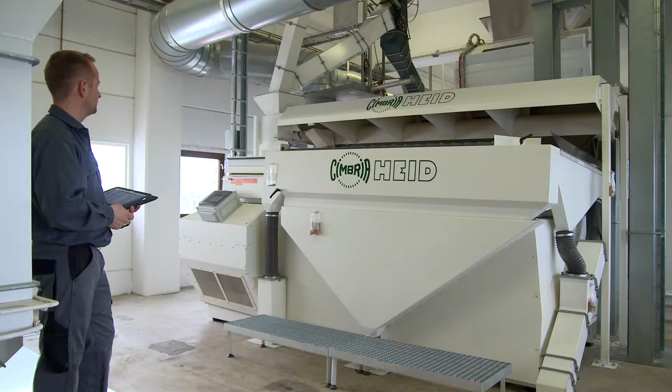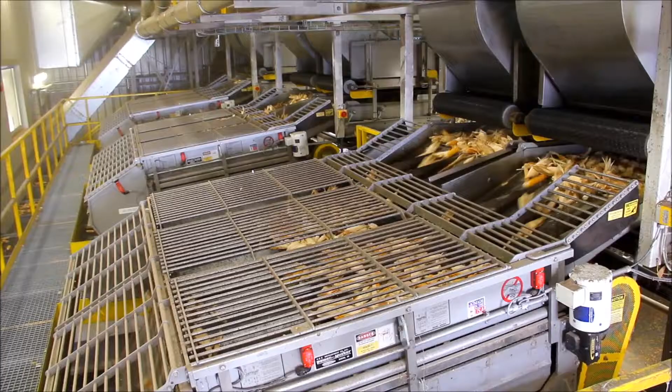Cimbria is a market-leading manufacturer of equipment for the bulk handling and processing of seed and grain. The business was founded in 1947 in Denmark, which is still home to two of its manufacturing facilities and the company's headquarters. Cimbria produces equipment for sorting, cleaning, drying and storing seed and grain, as well as custom-built handling and processing lines. Cimbria is really playing a part in feeding the world.

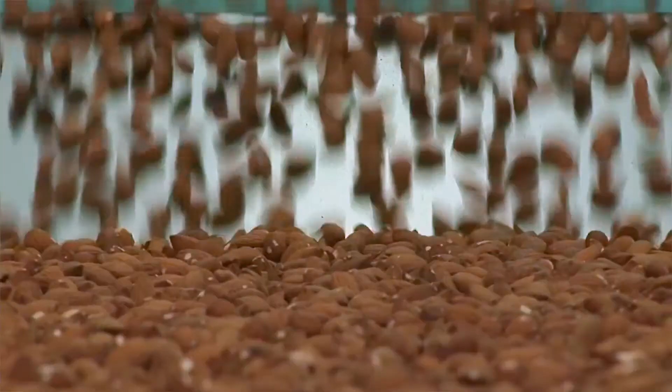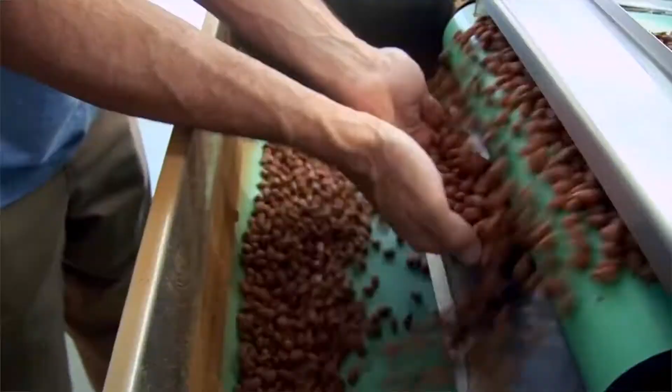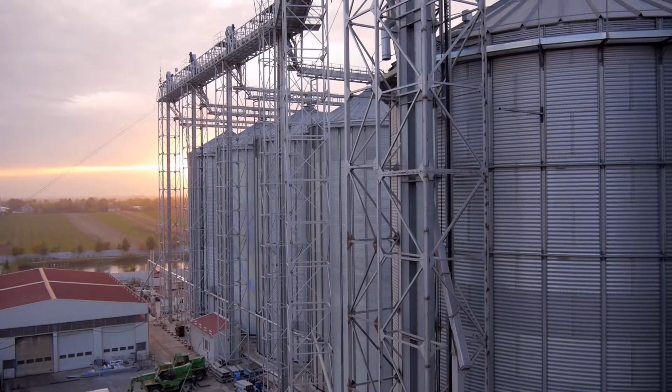We are number one in seed globally. We are number two in EMEA on grain. We are present in more than 42 countries in the world, producing grain infrastructures and also seed processing plants. And we deliver this to a large variety of customers like Monsanto, Syngenta, big seed processing companies. We also serve food companies like PepsiCo and also local players. Our solutions are actually helping in getting higher yields out of arable land, and it's also helping in storing grain and other food commodities.

For over 20 years, Silverfleet Capital had been investing in the Nordic region, as well as building businesses in the manufacturing sector across Europe. This reputation, together with an interest in the growing agricultural technology sector, led to Silverfleet Capital investing in Cimbria in April 2013, with a view to taking the business to the next stage.

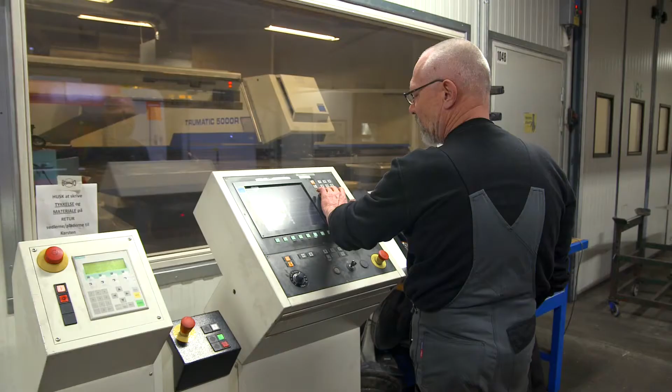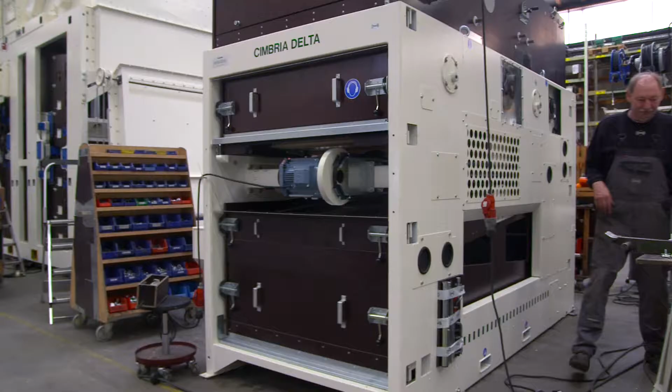Cimbria did tick all the boxes that we like in terms of manufacturing, Nordic, international and this agri-tech exposure that we like. The plan was to review Cimbria's manufacturing footprint, review its products and address entry into new markets. We wanted to essentially take the brand heritage that Cimbria has and focus on the European, Middle East and African market. At the time of investment, manufacturing was based in Denmark, Austria and Italy.

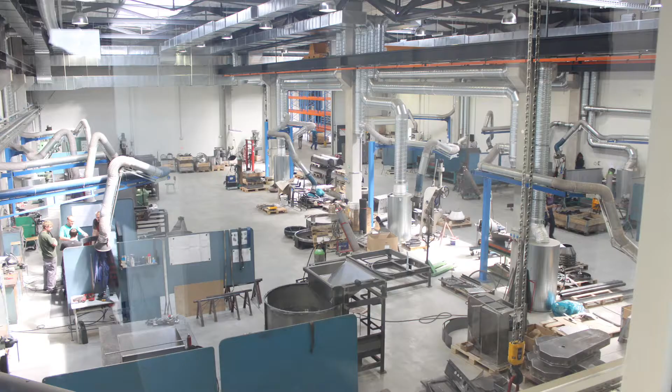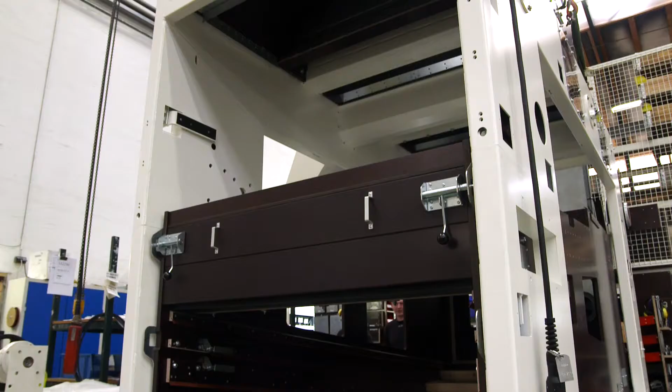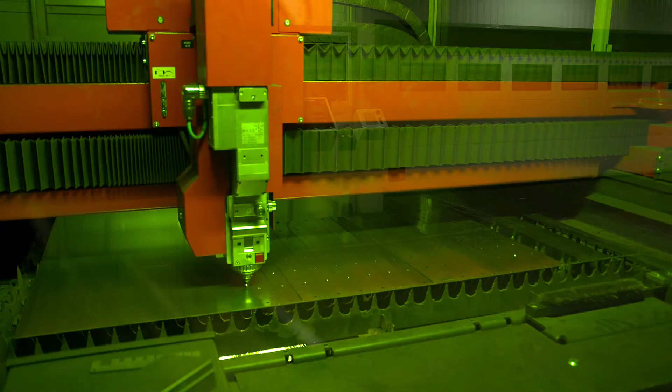As part of their review of the business, Silverfleet and management established a new manufacturing facility in the Czech Republic, where we have built a new factory, and the Czech facility can take more capacity. So over time, as we grow, more business will be put that way. And when we started looking at how each of the manufacturing sites plays a role in the group, we decided in the next strategic cycle to put much more emphasis on our Czech Republic platform. We've generally made sure that the manufacturing works as effectively as possible between those sites.

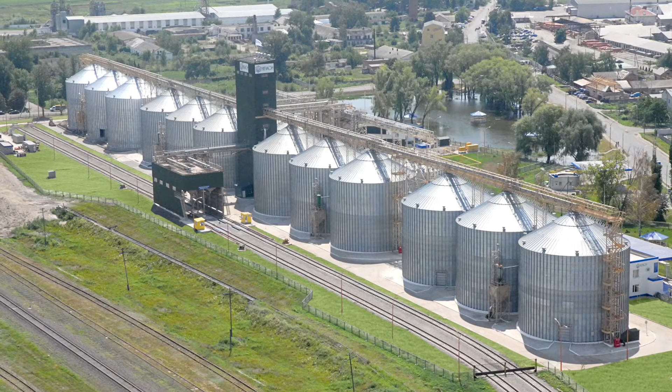Growing demand for the efficient handling of grain and seed was key to existing markets, and, driven by population increases in emerging economies, provided a natural opportunity for the business to enter new markets. Cimbria has had a history where we've been very strong in the areas where we have had grain production, like in Europe, Ukraine, Russia. But then you're looking at the world and say, well, this eventually ends up somewhere. There are a large number of countries that are net importers of grain. They also need transportation systems, storage facilities and the like.

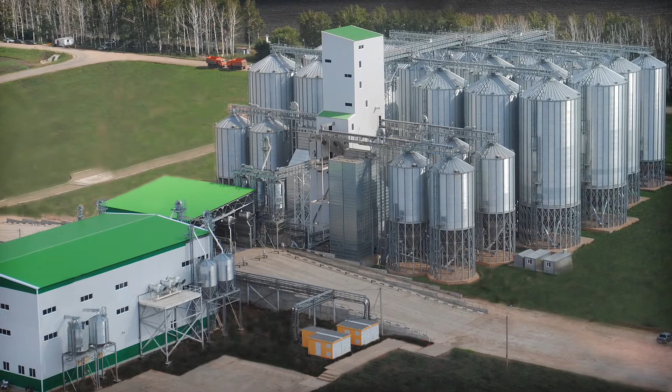Cimbria won a very large order for the Egyptian market over the last couple of years, and it has proactively gone out and sought to sell into the importing countries of predominantly the Middle East and Africa. And we're seeing great success with that take-up. We have still a lot of potential in South America. We still have a lot of potential in Asia. So there's still regional expansion that is possible.

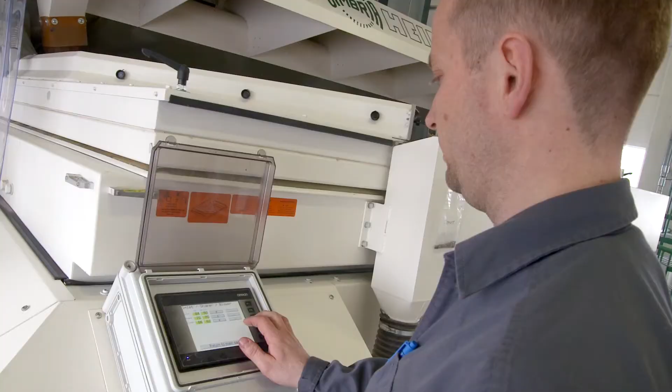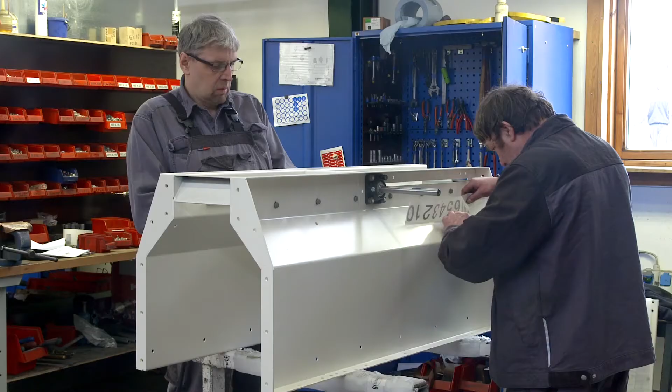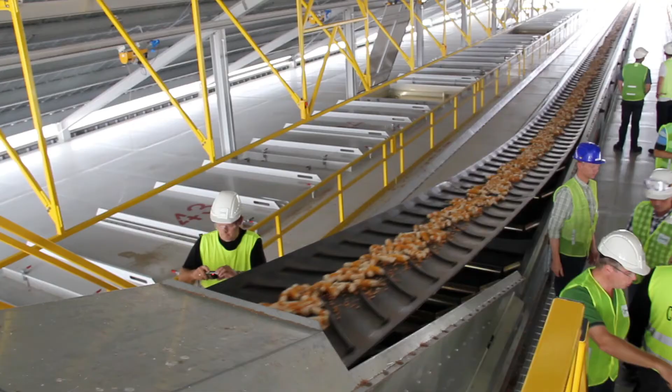Despite having more than 60,000 customer installations worldwide, Cimbria had traditionally focused on supplying new equipment. Yet it was clear there was a significant opportunity to expand its offering into the after-sales business. When we looked at the business objectively, the percentage of after-sales was tiny relative to similar manufacturing businesses in our experience. Equipment is becoming more sophisticated, so it also drives a demand from customers to have more service from the product suppliers. So a new after-sales division was established, focused on improving operational performance of customer facilities, and in so doing, creating value for Cimbria.

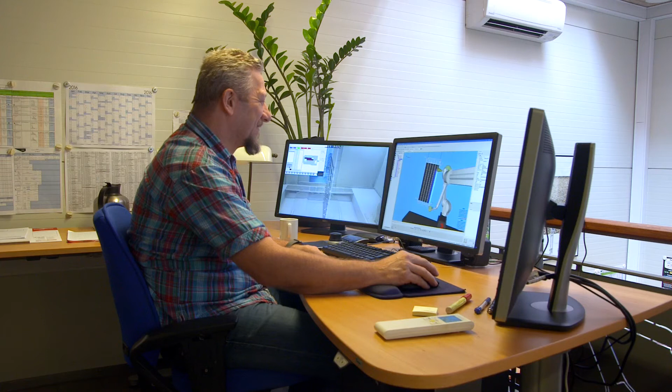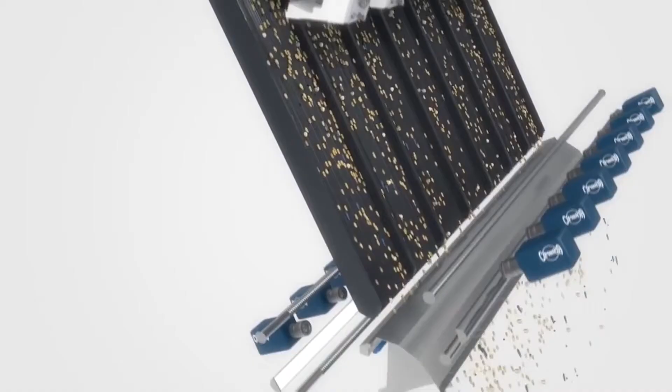Boosting R&D activity with the aim of driving product development was another key focus for Silverfleet and the management team. We really started creating a funnel of new products, which is then in turn going to inspire the market and drive our relevance as a technology provider going forward. The focus tends to be on greater throughput of tonnage, greater energy efficiency and robustness.

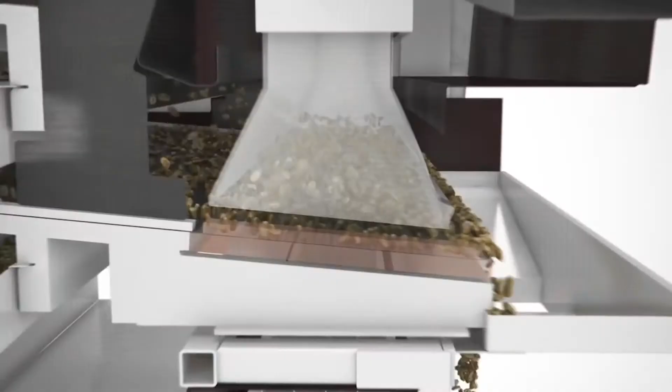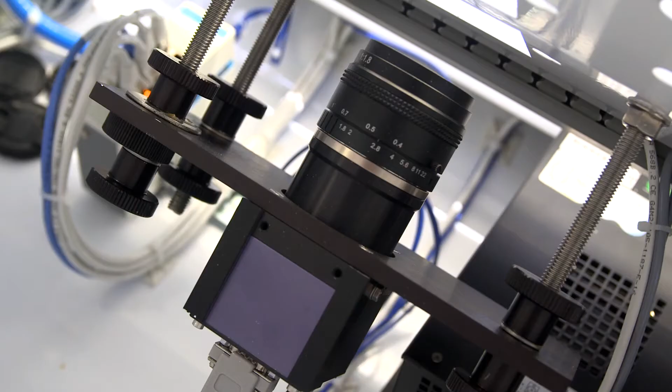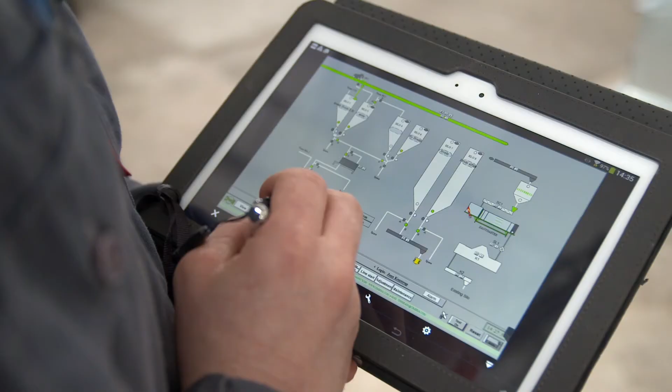The more technical end of development has actually been colour sorters, the sorting of grain using high-resolution digital cameras. It's the ability to process tons of rice or wheat or whatever it is, take a picture of every single grain and then spit out the ones through an air jet that don't match whatever criteria you've set. And that is extraordinary technology. But we're also looking at an integrated solution. Every piece in the puzzle has to be high performance. And so we've increased our innovation activities.

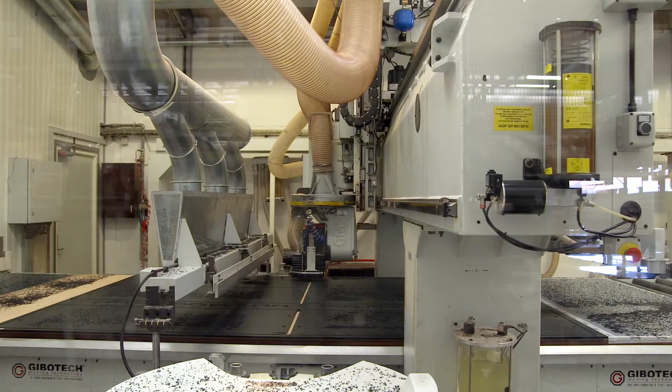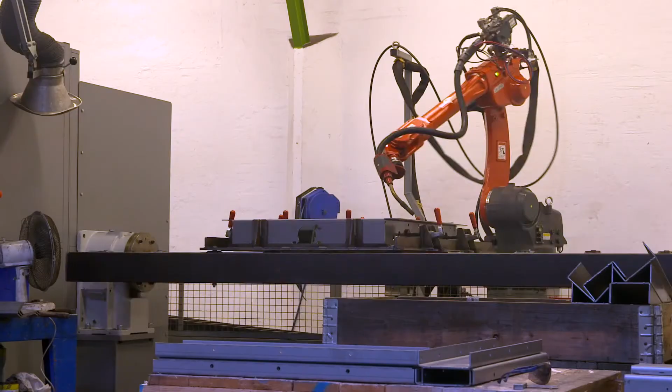As the business grew and diversified, Cimbria increasingly enhanced its resourcing and financial management in order to support the growth plan. We've had great success, not just in the top line growth of the business, but despite investing in overhead, putting the facilities in or the resources in to accelerate the growth, the profitability of the business has come through in leaps and bounds through these initiatives, the benefits of scale and the ability to get the manufacturing footprint right. What we've done with products and in the marketplace is what has driven the growth.

Silverfleet, they have really been contributing to build Cimbria to what it is today. And I think they've also allowed us to set the bar high.